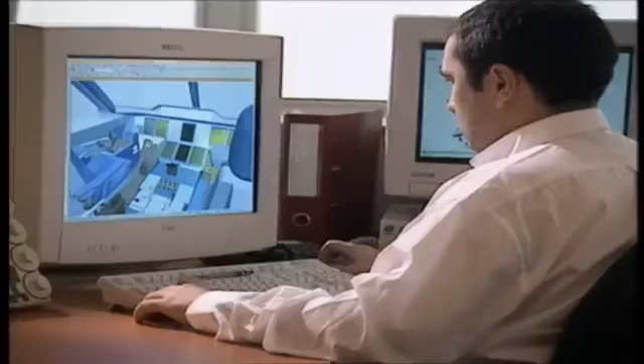It's a mega plane, bigger and heavier than any other passenger plane in the sky. It will hold more people than any commercial jet flying. Designers have spent billions. Now is the moment of truth. Will the world's biggest passenger airliner survive its maiden flight?

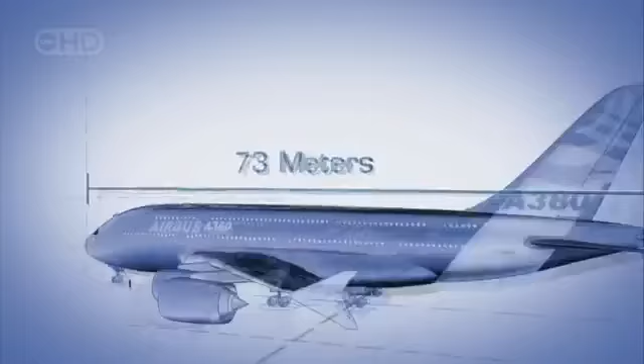An early spring morning, clear skies and a light breeze over southwestern France. Crowding the fields that flank Toulouse International Airport, 40,000 spectators, backpackers, campers and journalists from around the world, all vying for the perfect spot to watch the maiden flight of the Airbus A380, the largest passenger plane ever built. It's 73 meters long, 7 stories tall at the tail, almost 80 meters from wingtip to wingtip, heavier, longer and taller than a 747, with 2 full levels of seating, enough to hold over 550 passengers.

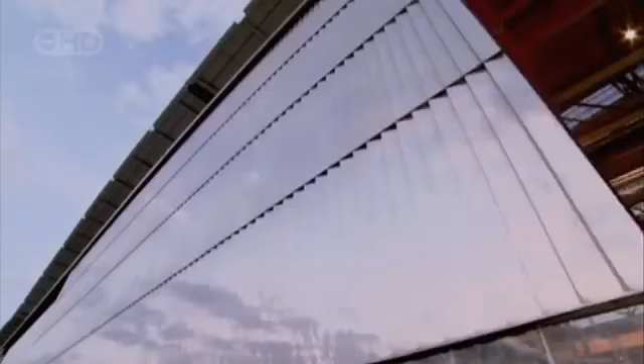Getting this monster off the drawing board required new, super lightweight materials, 4 powerful new mega-sized engines, massive new factories across Europe, and a computerized flight control system more sophisticated than any other in commercial aviation. This moment is the biggest gamble that the company has ever taken. A $12 billion investment, the company's entire future, and the lives of future passengers all ride on the success of this historic test flight.

Alongside the runway, a hush settles over the crowd as the megaplane comes into view. Gradually, it gathers speed, accelerating to reach its takeoff velocity of 269 kilometers per hour. Then, as it nears the end of the runway, the moment of truth. The massive nose tilts skyward. A sliver of daylight appears beneath the rear wheels, and the Airbus A380 takes to the sky for the very first time.

The engineers and technicians in the crowd breathe a collective sigh of relief. Their baby is flying.

The question now is, does anyone want a plane this big? Will the unprecedented size prove a boon or a boondoggle? Is this super jumbo the future of commercial aviation? Or the biggest white elephant since Howard Hughes built the Spruce Goose? It all depends on whether Airbus can convince airlines that travelers will want to trust their fates to this flying cruise ship.

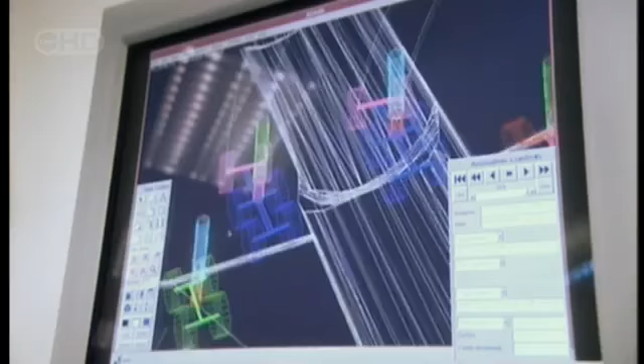It's a breathtaking dream, but no one knew if such a plane could be built. Some argued that such a craft would be far too heavy and expensive to be practical. But a tenacious and aptly named Airbus executive, Charles Champion, wouldn't take no for an answer. He encouraged his design team to think outside the box. There were lots of weird designs. Some looked at the double bubble, one of their first ideas—a double-wide fuselage. It looked promising, but computer analysis showed that it would be far too heavy and not sufficiently aerodynamic.

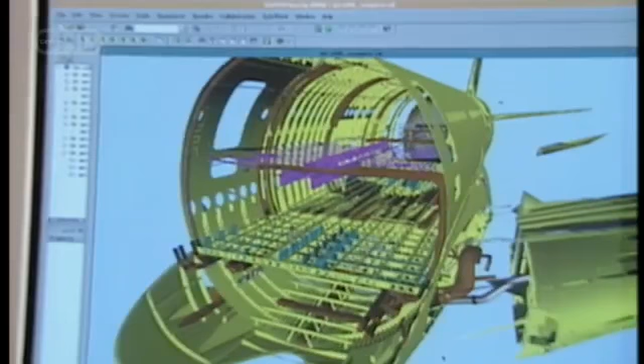So Champion sent his team back to the drawing board, and eventually they came up with this history-making concept: a full-length, double-decker passenger cabin, with a third deck below for cargo. Space-wise, it's the equivalent of 2 complete wide-body cabins, one on top of the other. The new plan called for an aircraft only 2.5 meters longer than Boeing's 747. It was 15 meters wider and 5 meters taller.

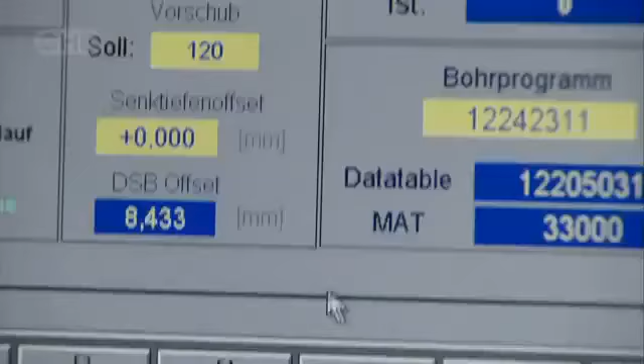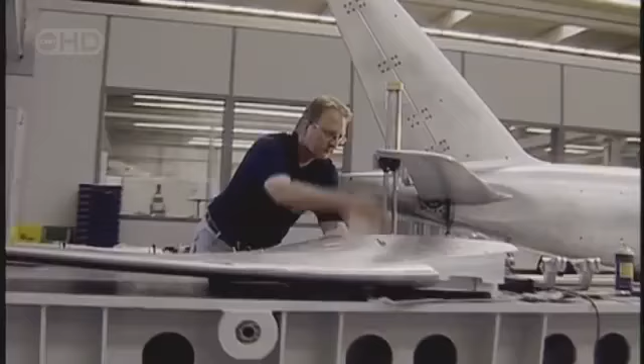But when they ran the design figures through the computer, they had a shock—the plane was far too heavy. We came up with horrid figures, saying, my God, this is the weight of the aircraft, it doesn't work. So what we did immediately at the launch of the program, or 2-3 months afterwards, we launched a very strong challenge on the weight. The team set out to bring the base weight of the aircraft below 277 tons—that's only about 50% heavier than the 747. An ambitious goal for a plane designed to carry over 100 more passengers and their luggage halfway around the world. Unless Champion and his engineers could find the means to beat that target, the dream would die.

Airbus engineers were faced with a design challenge that called for a lightweight plane carrying over 550 passengers at a lower cost per seat, not to mention quieter and less polluting than anything in the air. The design team knew they would have to rethink everything. They needed lighter materials, more powerful engines, larger wings, even bigger and smarter factories. Every component would have to be scaled up from supersize to mega size.

But even while the engineers were still scratching their heads over the details, the Airbus sales force was already hard at work, seducing customers with visions of the future. They created a full-sized interior mock-up that promised passengers in coach some relief from the grind of travel, with seats an inch wider than in other planes, and overhead bins 10% larger. Each plane can also feature a new interior illumination scheme to eliminate the upsetting effect created when flight attendants suddenly switch on overhead lights. The kinder, gentler system in the A380 mimics the gradual transition from day to night and back to daytime again. These and other innovations make the plane distinctive, but it's the promise of opulent luxury that really turns heads. To help build excitement, computer programmers constructed a virtual showroom where airlines can bring to life their wildest design fantasies.

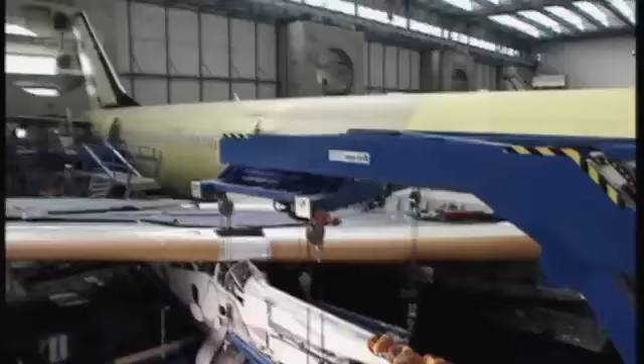Of course, no dream could take flight until engineers came up with a way to lift all that weight. In late 2000, builders finally settled on a design. For power, they would buy engines built by Rolls-Royce, capable of providing 30% more thrust than the engines used on the 747. Each massive power plant cost $15 million, as much as a ton of gold. Altogether, they account for almost 25% of the cost of the entire plane.

If there's one thing this aircraft needs, it's thrust that won't quit. Each engine provides up to 80,000 pounds of force. Running at top speed, this mega guzzler sucks down a litre of gasoline every second.

The A380 is designed for routine flights lasting 13 hours or more. That means when it's fully tanked for takeoff, the A380 carries a lot of fuel, 260,000 litres, 20% more than the load carried by the 747.

Just imagine what would happen if anything threatened the integrity of one of those fuel tanks, like a catastrophic engine failure that sends shards of metal tearing through them. That's the nightmare that haunts engineers at Rolls-Royce, and they're about to destroy an engine to make sure it never occurs.

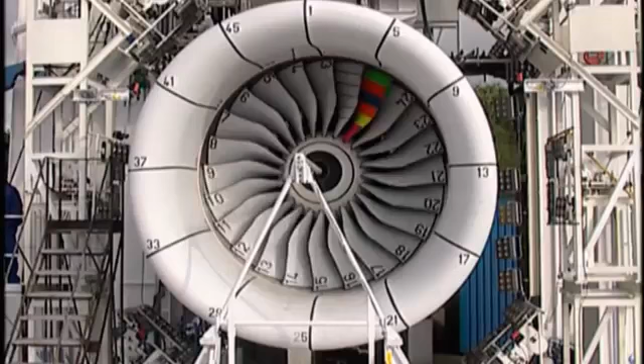These 24 titanium fan blades suck air into the maw of this A380 engine. Each blade is 1 meter in length and weighs 15 kilograms. Lightweight, but super strong.

When the engine is roaring along at full throttle, the blades spin at almost 3,000 revolutions per minute. The centrifugal force at the tip of each blade is equivalent to the weight of a 110-ton locomotive.

If one of these were to break off and escape into the engine, it could wreak unimaginable destruction to the plane.

That's why Rolls-Royce engineers are about to conduct an engine failure test. They're going to intentionally cause one of the fan blades to break off at full speed in order to prove that the engine enclosure can contain the damage without letting any metallic fragments escape.

In the process, they will totally trash this $15 million engineering marvel, a small price to pay when the lives of over 550 people could be at stake.

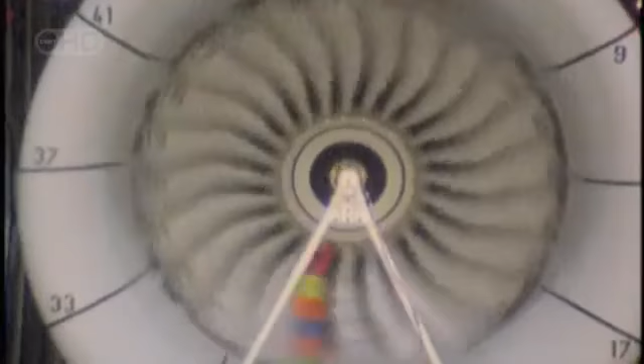A super slow-motion camera captures every moment in excruciating detail. The blades are striped to make visual measurement easier. When the fan is spinning at full speed, engineers send a signal to explosive bolts at the base of the multicolored test blade. Faster than even this camera can see, the knife-like piece of metal shears off and flies into the engine mechanism, wreaking havoc, but no fragments escape.

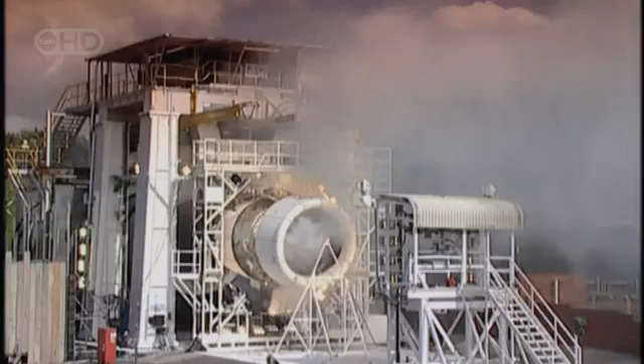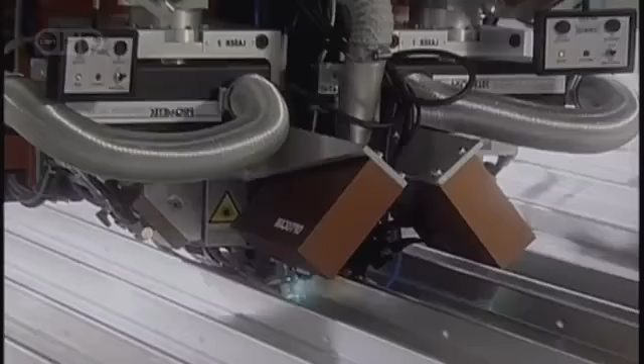The A380 engines are safe for flight, but there are many more pieces to the puzzle. Every other major component would have to be designed from the ground up.

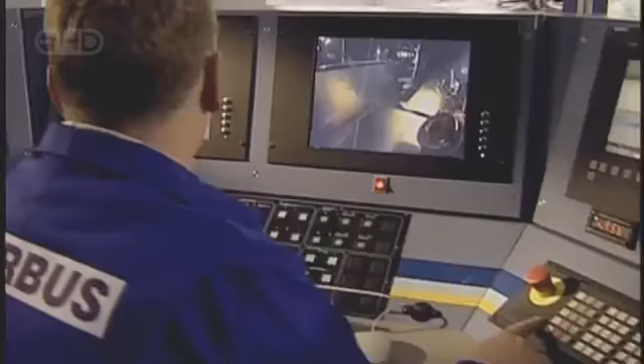Luckily, Airbus has already turned the world into a giant mega factory, with 1,500 suppliers and facilities used to build its existing planes, scattered over 30 countries, yet tightly linked by an advanced communication and transportation network.

To assemble the hundreds of A380s the company hopes to sell in the coming decades, planners settled on 5 countries to build the major components: wings in Wales, engines in England, the fuselage and vertical tail section in Germany, the horizontal tail section in Spain, and of course France, where all the pieces came together to assemble the finished plane.

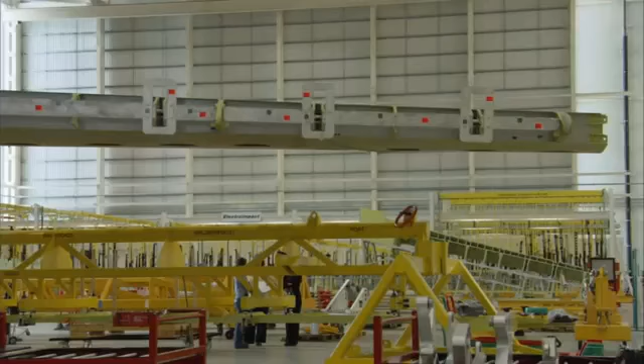The process begins in Wales, in 2 huge new wing factories, built to assemble the largest and most structurally complex commercial airplane wings ever designed. 32,000 components, shipped in from every continent except Antarctica.

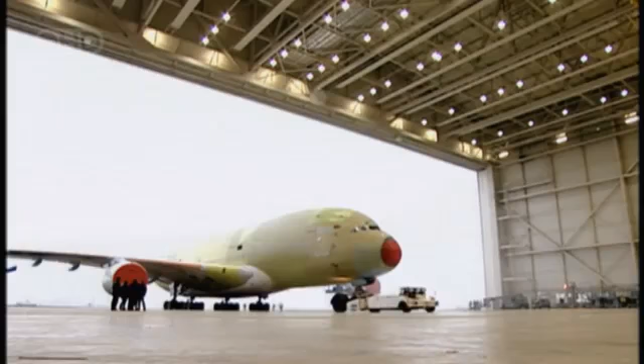The wings on the A380 are true mechanical marvels. They provide flight control and enough lift to carry the fuselage, plus the 4 supercharged engines, each weighing nearly 6.5 tons. And with 260,000 liters of fuel loaded inside 10 interior locations, the wings are also flying fuel tanks. They're one of the most critical structural components in the entire aircraft.

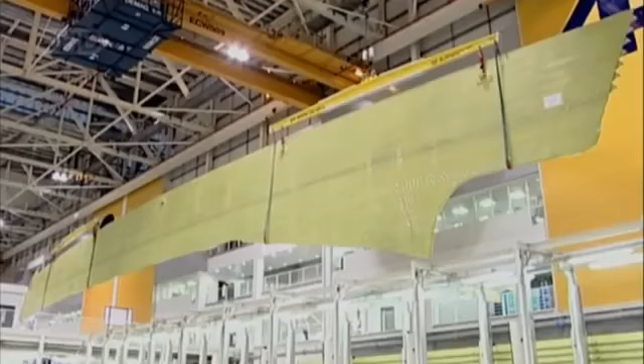The precision construction process begins with sheets of aluminium, destined to be shaped into the 10 panels that cover each wing. Each piece has its own shape and weight requirements. To whip one up, just follow 3 not-so-easy steps: shave it, wrap it, then bake it.

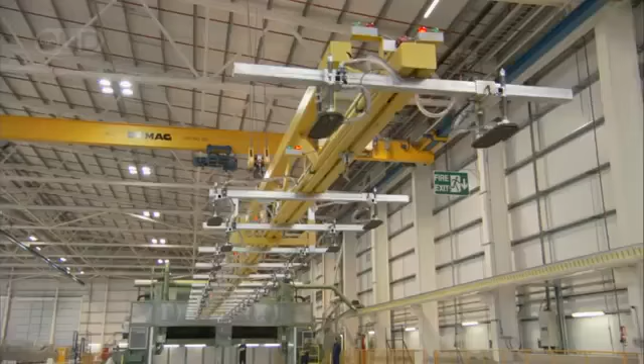This 34-meter-long slab of aluminium weighs in at 5 tons, way too heavy for the wing panel it's destined to become. In its final form, it will weigh close to 1 ton. So off it goes, to get the aerospace version of a tummy tuck. Overhead cranes use 32 powerful suction nozzles to lift and transport each aluminium slab.

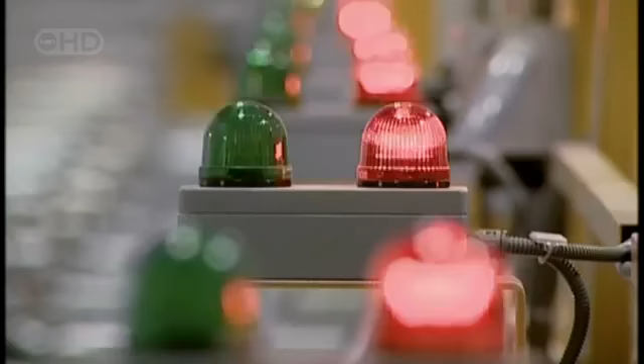Tim Fernifer carries the burden of responsibility. Using a remote-controlled steering device, he guides the 5-ton piece of metal across the factory floor, but he can't do it alone. His team must watch the motion of the wing panel throughout the ride. You've got to be particularly careful handling it, but I can't see down the other end, so I need another pair of eyes down there. It's just health and safety issues - we have to watch, make sure everybody's out of the way when it's actually moving.

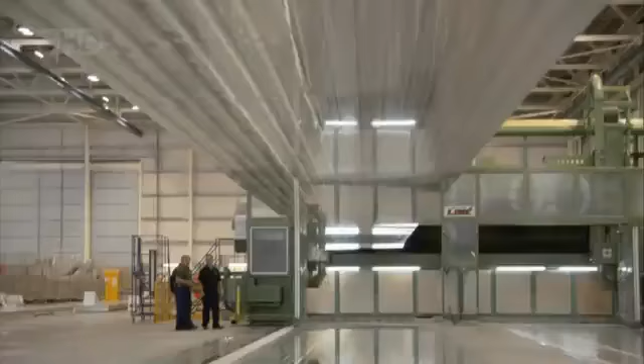It's a dicey ride across the factory floor before the huge sheet can settle safely into position, now under the control of a massive horizontal metal shaping device, a milling machine 40 meters long.

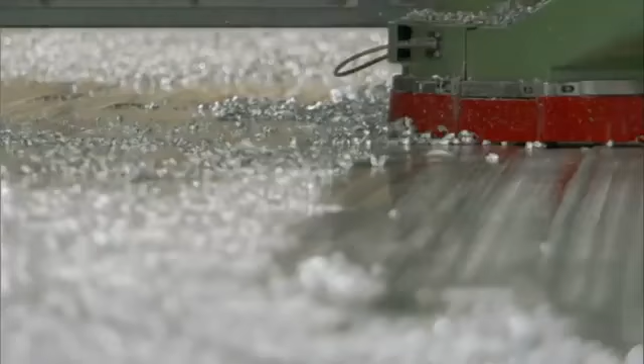Like an oversized cheese grater, the precision cutting head slowly cuts back and forth across the surface of the wing, painstakingly shaving the aluminium until the panel shape matches the 3D contour map stored in the machine's computer. The process takes up to 3 days and eliminates 75% of the panel's weight while maintaining its strength.

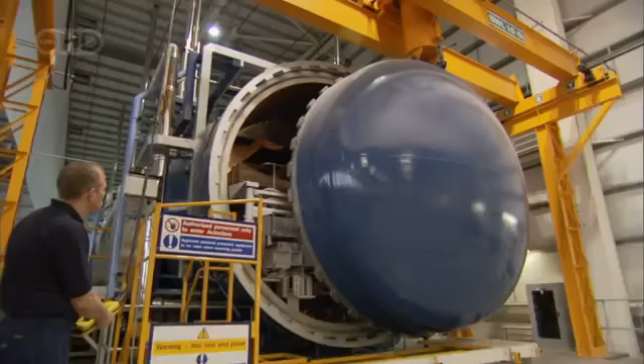Then it's ready for the oven, one of the world's largest pressurized heat chambers, 42 meters long, almost 6 meters wide. Technician John Massey has cooked plenty of wings for smaller Airbus planes, like the A320. It's a challenge to see it go from the size of the 320 to the size of the 380 - it's a huge, huge jump.

The A380 wings are 50% larger than A320 wings. That means a 50% greater chance of error in this critical process. Baking requires careful setup.

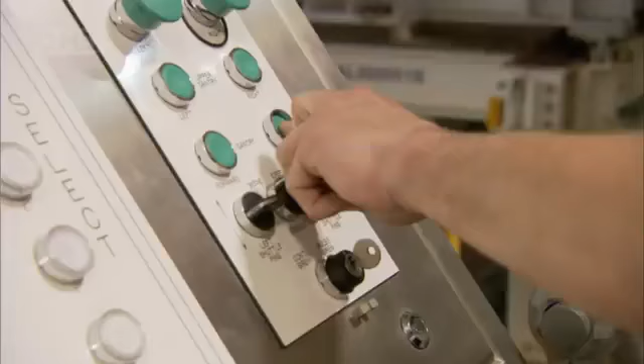First, Massey and others place the segment in a special metallic form. Then they vacuum seal the entire assembly with a massive piece of plastic shrink wrap to protect the metal from contamination. Inside, the heat must be uniform across the entire panel, 150 degrees centigrade, with no room for error.

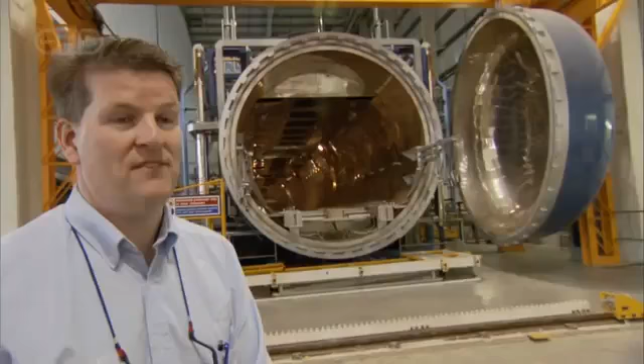We try to avoid any changes in the vacuum or the temperature, so the temperature must remain constant right throughout the process. It must maintain within 3 degrees, otherwise the run is invalidated. After 24 hours, the panel is ready.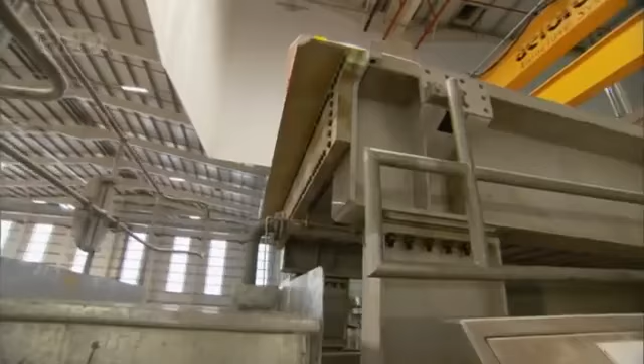Specially equipped vehicles rise up and move into place in front of the oven. All eyes are on the plastic protecting the wing panel. If it breaks, the aluminium wing piece is compromised - a disaster. The entire wing panel would be worthless. If the bag bursts, it means starting the job again from scratch.

Anxiously, they scan the surface for any breach. At last, the wing is cool enough to touch. Good news - the bag appears to be intact.

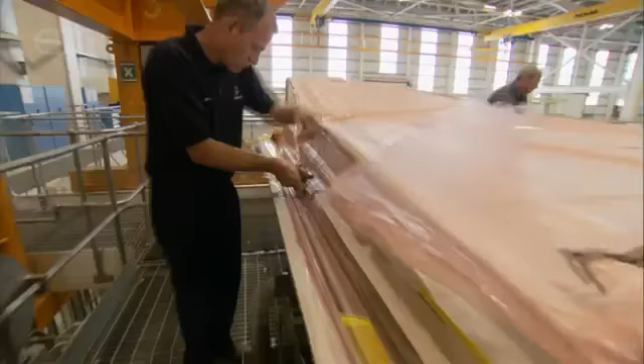Finally, the wing segment arrives in its docking bay. Here, the technicians first remove the plastic and cloth wrap. Now begins the tedious search for flaws.

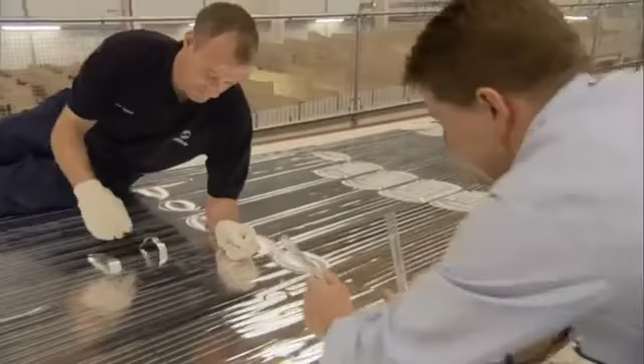John's boss, Gareth Williams, arrives to inspect the piece. He retrieves small metal rods that were baked onto the top of the wing panel. Each of these cylinders tells an important story about future safety. These are test pieces made of the same material as the wing panel, and we use them to confirm that the heat process this part's just gone through is correct and to the right specification.

When this testing phase is complete, Gareth and John get the okay to move the wing to its next destination - the nearby wing assembly plant, an enormous brand new factory located just up the road. It's one of Britain's largest industrial buildings built in this century, nearly 85,000 square meters in area, equal to 12 full-size football pitches.

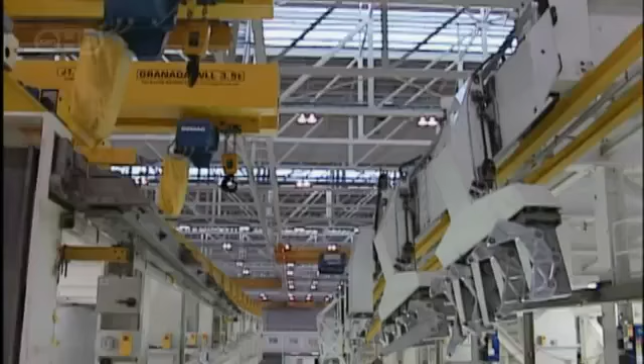This is where the builders attach the aluminium skin panels to the wing skeleton. George Lee guides his team through the tricky assembly process. Today they're preparing to lift and place one of the largest of the 10 aluminium panels, 34 meters long and weighing in at more than 1 ton.

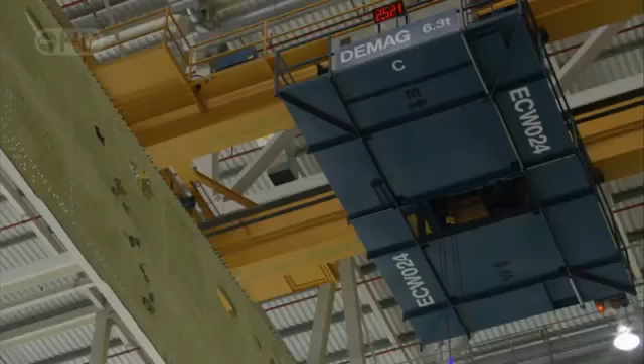Size is a great challenge because everything requires some form of overhead lifting. Nothing can be lifted manually, so virtually everything requires overhead craneage movement, and therefore the management of the craneage system is very, very important. The panel hangs like a huge guillotine, suspended over the factory floor.

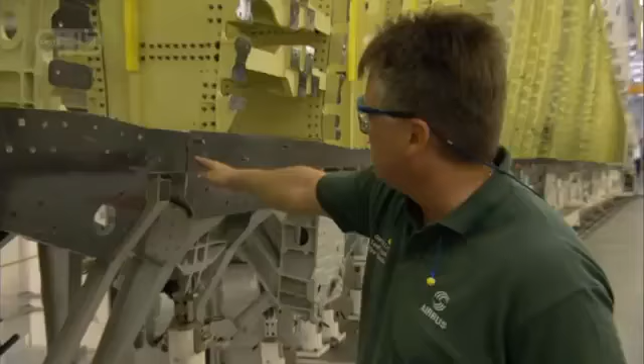But that's not all that's hanging over the assembly team's head. Time is running out. Along the edges of the partially constructed wing, builders have applied a sealant that'll help ensure the integrity of the fuel tanks. The sealant dries quickly, within hours. The team must fit the wing panel into place before the sealant dries, or the wing could be defective.

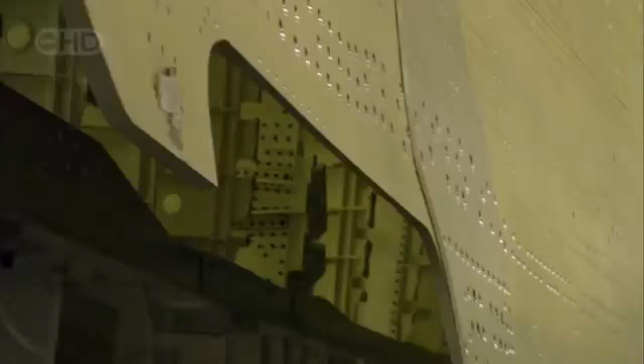This time they're cutting it close. The only concern I've got is the time factor. If they don't succeed, the team will have to scour the sealant off the aluminium surface and start the whole process again.

Finally, the panel settles into place - 1 down, 9 to go. It can be stressful, yeah, it can be stressful. At certain times it's an enjoyable job, because when it actually all works and goes together, it's quite enjoyable. You've made it an achievement.

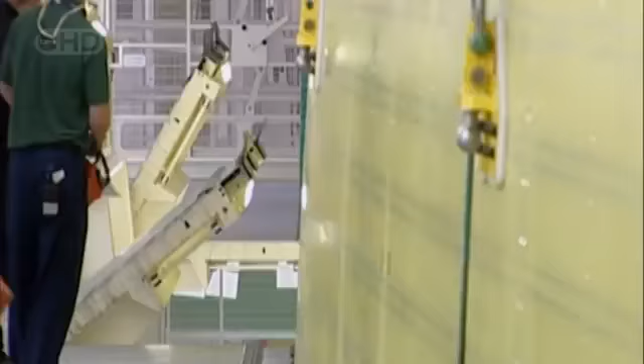Now it's time to glue and bolt together the pieces, like building the world's biggest model airplane wing.

This part of the process remains a carefully guarded trade secret. The company wants our cameras off. No cameras.

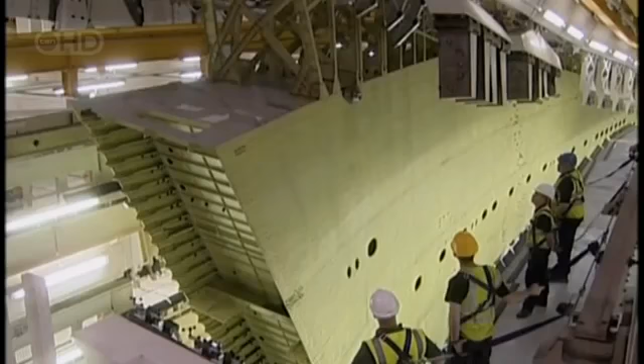The secret assembly process inside the jig will take nearly 4 weeks to complete, but it takes more than a wing to make a plane. All across Europe, more factories are coming online, pumping out body parts of this giant Franken plane.

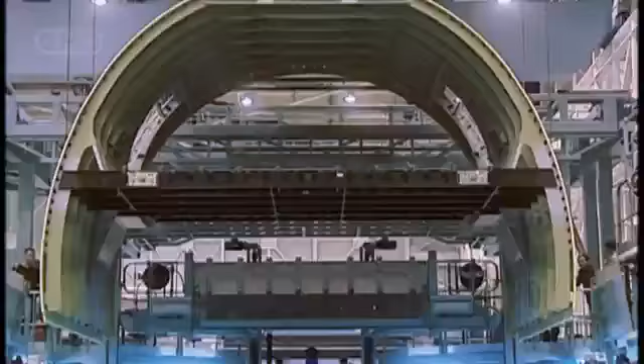But not everyone is happy to see this kind of progress. Some locals in Germany are up in arms over Airbus's ambitious plans.

This is the newest Airbus factory in Hamburg, a megastructure big enough to house 4 A380s side by side. Airbus has been building airplane fuselages in Germany for more than 30 years.

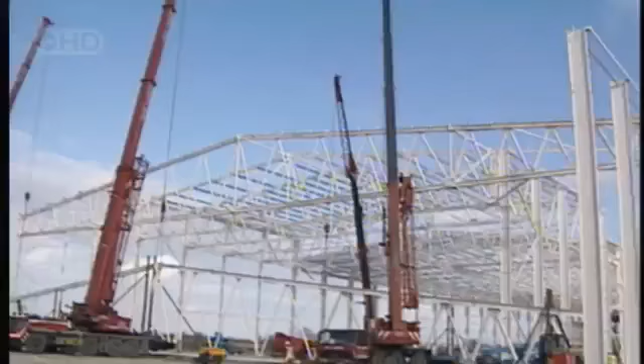But with the announcement of the A380, the company needed to massively expand the site and send finished planes here to get tricked out on the inside and painted on the outside.

No matter what the customer wants their plane to be, a 550-seat cattle car, a high-class hotel in the sky, or even a heavy-duty freighter, this is where the seats, the carpets, the stairs, and yes, even the bar and the waterfall will all be installed.

The expansion plan called for 3 new buildings and a longer runway to accommodate the massive plane, but there was a problem.

Airbus's main factory here sits alongside Germany's Elbe River, smack in the middle of Europe's largest tidal wetlands. It's a very special area because we have there the influence of water from the country and tidal water from the sea, so we have a mixture of sweet water and salt water.

This fragile ecosystem is home to 70 species of migratory birds. Now 71 if you count the Airbus A380. Airbus wanted to fill in 140 hectares of pristine wetland, and local activists cried foul.

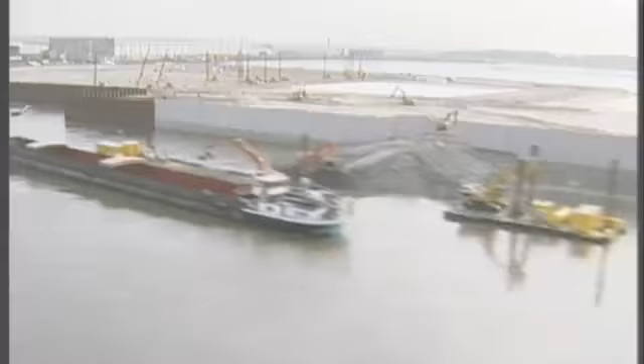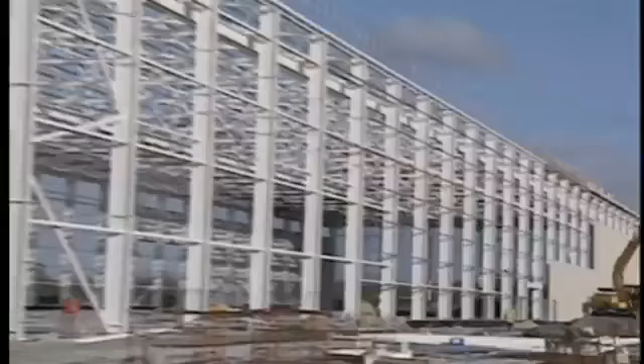A pitched battle in the courts and demonstrations in the streets delayed construction of the factories for over 2 years. But eventually, local and national politicians who wanted to bring business to the community intervened. The factories went up. One got busy building fuselage segments, but the other 2 stand nearly empty.

More lawsuits still block the Hamburg facility from taking delivery of all of the planes it's meant to finish. Unless the company wins in court, it may have spent a few hundred million dollars building a factory of little use.

The problem lies with the runway. Airbus needs a longer runway to accommodate a heavy-duty cargo version of the A380.

We need the runway extension in Hamburg for the pilot to test the performance of the aircraft, and he only can test this when he has an aircraft with a weight which is approximately the weight you normally have in cruise altitude and a normal scheduled flight.

That plan to lengthen Hamburg's existing runway has met with considerable resistance from locals. Their concern: extending the runway will bring the tarmac to within just 450 meters of village orchards, and uncomfortably close to a Lutheran church that houses a priceless organ built in 1688.

A delicate instrument that could be damaged by ground vibrations and wake vortices, turbulent bands of air similar to miniature tornadoes. We have very precise information on the generation of these wake vortices, small tornadoes, wind generated by every aircraft, more or less.

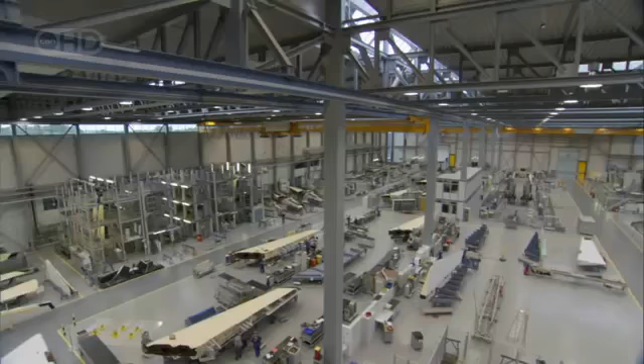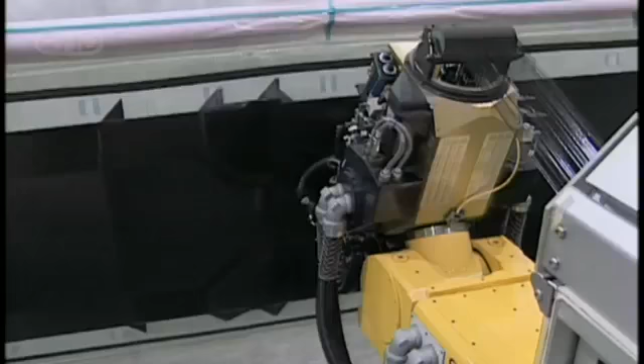But just 57 kilometers away in the town of Stade, another big gamble is underway. The company is using a futuristic material to build the largest commercial aviation tail fin in the world. It's called carbon fiber reinforced plastic, made from the same stuff that gives diamonds their incredible strength. Carbon fiber is 6 times stiffer than steel and much lighter. It's the only option if builders are going to keep the weight of the plane below the target of 277 tons.

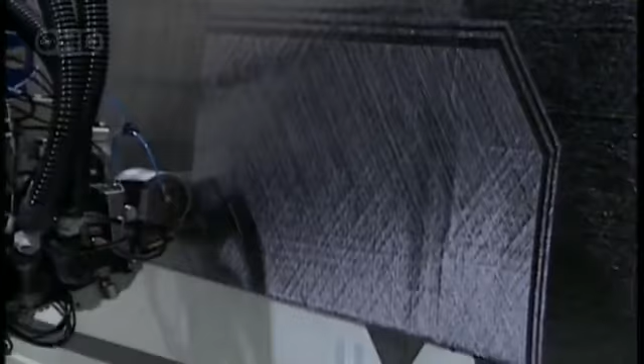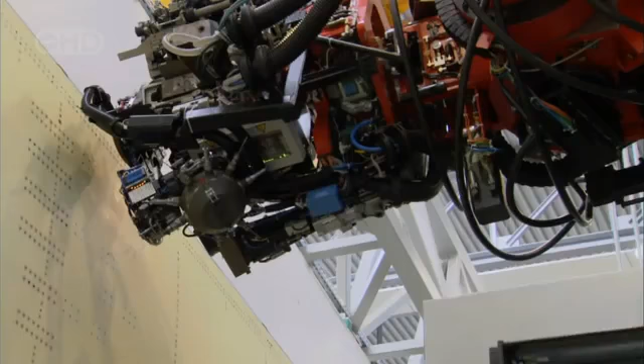Unlike forged metal, carbon-reinforced plastic parts are actually woven, like cloth. Fabricating machines spin out tail panels by combining super-strong carbon fibers with plastic resin to create almost any shape designers can imagine. After baking, strengthening, painting, and drying, technicians join the lightweight panels to the tail skeleton with the help of a computer-controlled riveting robot. Working around the clock for a week, the robot makes 10,000 critical connections with tolerances no human can match. The integrity of the tail fin is crucial to the safety of passengers.

Airbus engineers know only too well what can happen if a tail structure fails. In 2001, American Airlines Flight 587 left JFK Airport in New York. Less than 3 minutes later, the Airbus A300 aircraft had crashed in Rockaway, a neighborhood in Queens, New York. The belly fell, the plane pitched, then the left side went down as it made its way to the ground.

It was the second deadliest crash in US history, and investigators made a disturbing discovery. It had been caused when the tail fin and rudder, made partly out of composite materials, sheared off as the plane accelerated. Investigators concluded that cockpit errors, not a failure of the carbon composite material, most likely caused the crash. Builders have applied the lessons of that catastrophe to the tail fin of the A380.

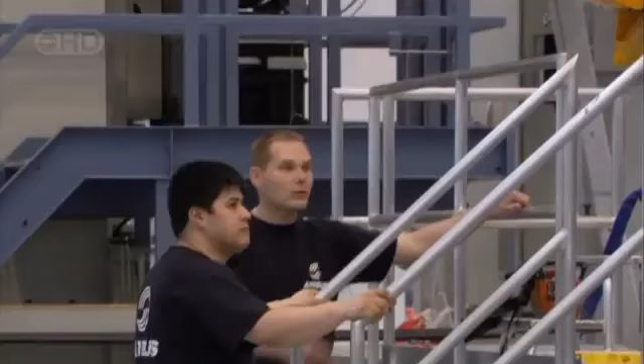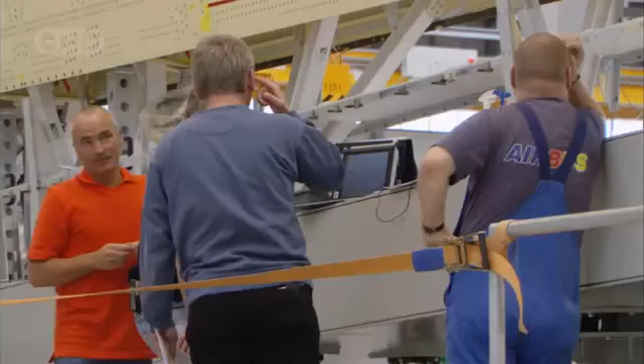But today, something's gone wrong on the factory floor. A lightning strike zapped the power supply, and now the precision riveting robot is dead in the water. We had a storm, a lightning strike. The PC failed and the hard disk was completely gone. Mother Nature has thrown a wrench into the works, causing a total crash of the system. It is electricity. Sometimes it happens. Normally we are protected, but it can just happen.

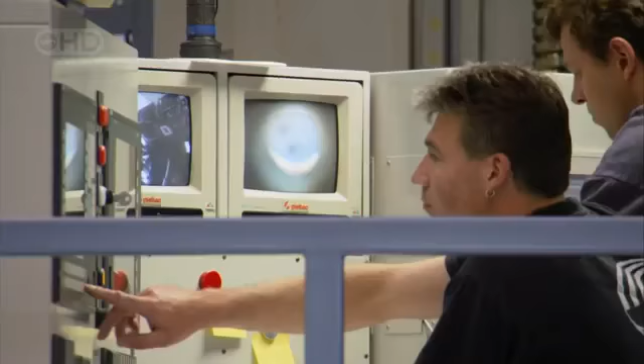Critical hours pass as Kai Baumgartner and his colleagues struggle to get the robot back online. If they can't fix the computer, they can't make the deadline set for finishing this tail fin. Kai and his team must find the problem, and quickly. By the end of the shift, the sound of riveting echoes through the factory once again.

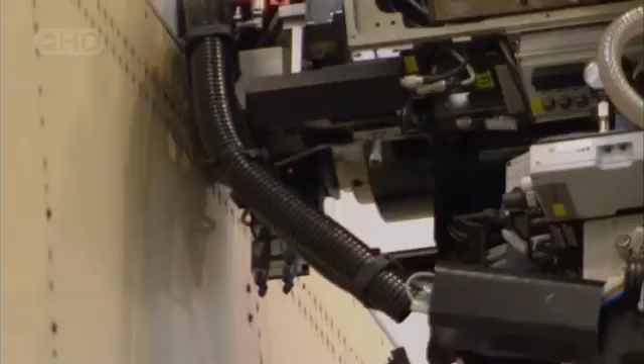Kai is finally back at work, personally verifying that every one of the 10,000 connections is perfect. A tiny camera positioned on the end of the riveting machine allows Kai to carefully examine each rivet, making sure to catch any abnormalities in the process. I make sure that the drill doesn't get stuck or any mistakes happen. I have my different systems here. It can happen that something gets stuck or that an error occurs. It's a repetitive process, but Kai must remain vigilant to safeguard the lives of future passengers.

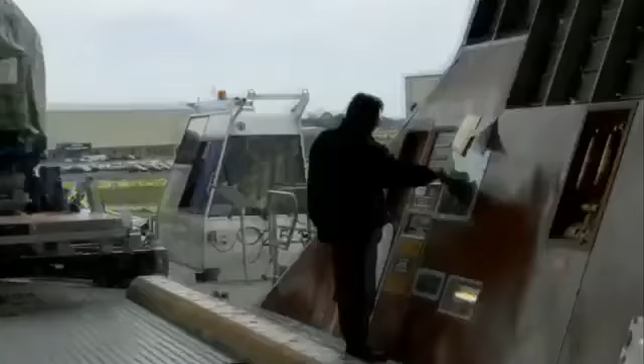Around the world, manufacturers and suppliers are putting the finishing touches on the components of the A380. But putting all the pieces together will be a logistical nightmare. Airbus's existing transport system, the custom-built mega freighter called the Beluga, is too small to haul the A380 components to the assembly factory in Toulouse, France. So builders came up with a risky plan to haul millions of dollars of critical components by water and land.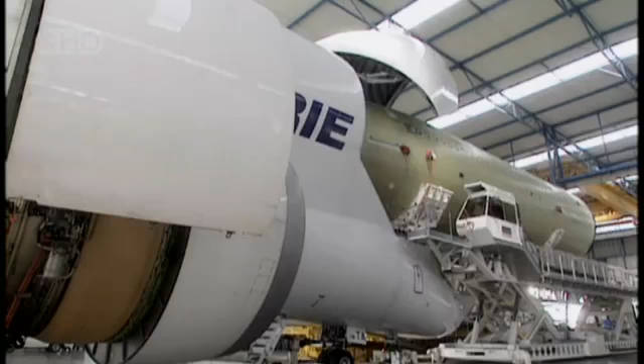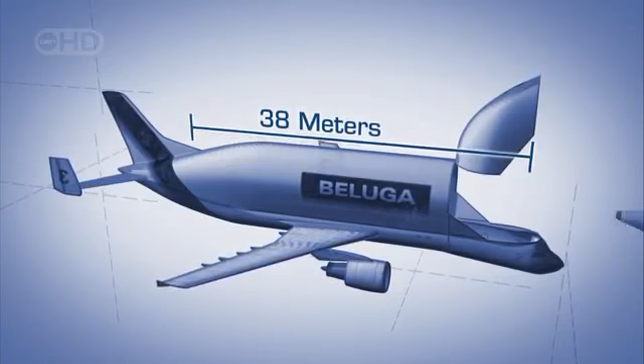Airbus had a problem. They needed to move pieces for the largest passenger plane in the world from factories all over Europe to their final assembly plant in Toulouse, France. For smaller planes, they could use the Beluga, Airbus's distinctive custom-built transport plane. The Beluga's cargo hold measures 7 meters high, 7 meters wide, and 38 meters long, big enough to swallow the fuselage, wings, and tail sections of Airbus passenger planes like the 150-seat A320.

But when Airbus decided to build the massive A380, the sheer size of the parts overwhelmed even the Beluga. The Beluga is far too small to carry the A380's enormous double-decker fuselage or its record-breaking wings. So to get their parts to the assembly plants, the company now had to move them by sea and over land, instead of a 2-hour ride in the belly of the Beluga. Parts for the A380 joined a days-long parade of specially outfitted ocean ships, river barges, and trucks.

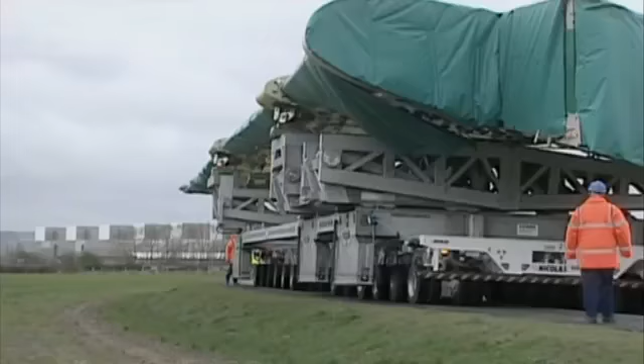Keeping this massive system on schedule is the job of Surface Transport Coordinator Philippe Nedelec, who has to keep it all moving fast. I like to say that I am a kind of conductor. I have to impose the tempo to everybody.

Wings and fuselage arrived by sea in the port city of Pauillac in Bordeaux. From there, it's 96 kilometers by barge up the Garonne River. It's a tricky bit of navigation to clear the historic Pont de Pierre Bridge, a prized landmark built by Napoleon almost 200 years ago. We have to cross a very old bridge. And at the beginning, the Bordeaux people were very afraid of what these Airbus people are going to do with our nice bridge.

To maneuver beneath the Pont de Pierre, Philippe and his team keep careful track of the tides and the weather. If they don't time their trip just right, if the water is too high or the current's too strong, they could collide with the bridge, destroying precious cargo and damaging a priceless piece of history as well.

But waiting for the perfect moment isn't always an option. Suppose we miss a call for weather conditions or some other things, then the boat can miss a tide, so we can miss 6 hours. And this 6 hours you can miss 1 week because we cannot start the road convoy every day. It's not so easy. We cannot start when you want.

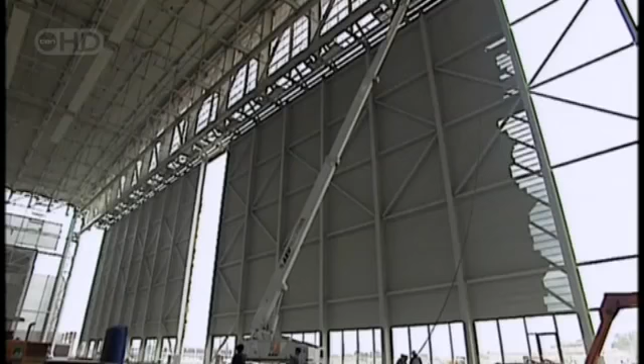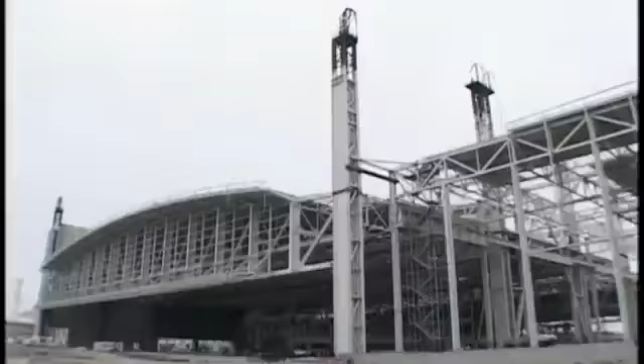At last, the convoy arrives at its destination, the final assembly line, the nerve center of the entire operation. The final assembly line sits on the edge of Toulouse's Blagnac Airport. As with all A380 factories, this one is huge: 500 meters long by 250 meters wide and 15 stories tall, built with 32,000 tons of steel, enough to build 3 Eiffel Towers.

It's in here that the massive plane finally begins to take shape with the help of a gargantuan assembly structure known as a jig. According to Julien Pouillou, there's nothing else like it in the world. We are standing in front of the biggest jig that is used in the world to assemble an aircraft. This is Station 40.

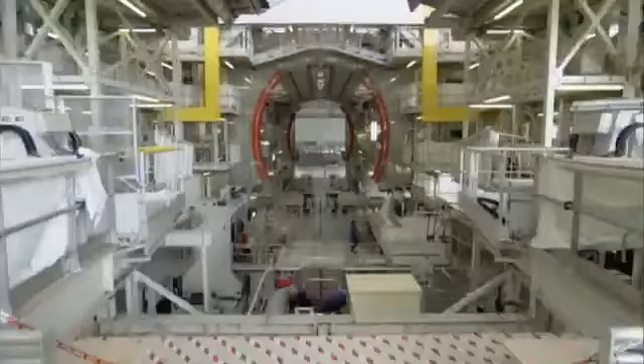Station 40 is where the fuselage, wings and tail all come together. The one-of-a-kind jig stands 5 stories tall, weighs 1,200 tons, and comes equipped with 4 elevators to carry workers to their stations. This is where theory becomes reality.

As pieces made all over the world finally come together, if there's been any error, if the pieces don't measure up to spec, or if the joints don't come together just right, within millimeters, the huge passenger craft won't be fit for flying.

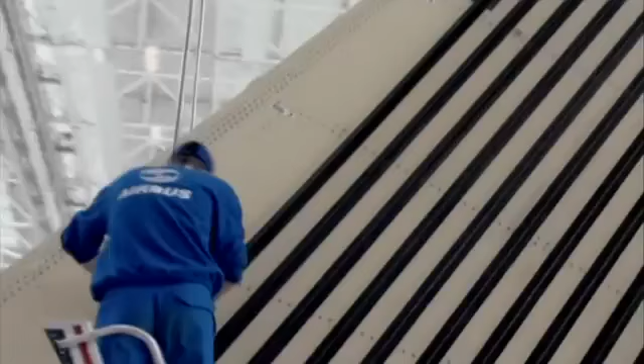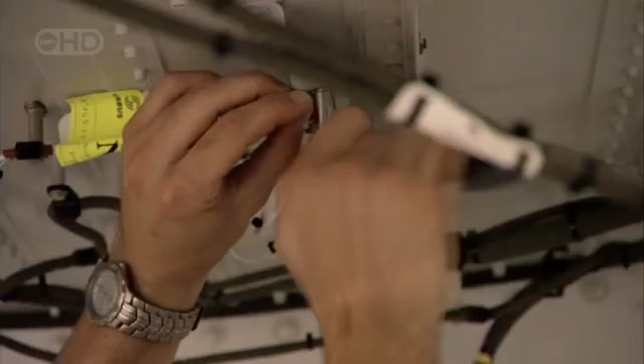The lives of future passengers depend on the steady hands of these craftspeople and engineers, working inside the mighty Station 40. The challenge is for us to assemble those pieces together at the same time, because we have a lot of workers working in the same area at the same time, and they have to do all sorts of completely different tasks. One has to take care of the wings and one has to take care of the fuselage, and so they are not doing the same job, but they have to do it together.

Work on this plane now proceeds at an intense pace. It'll take 4 weeks to complete the assembly.

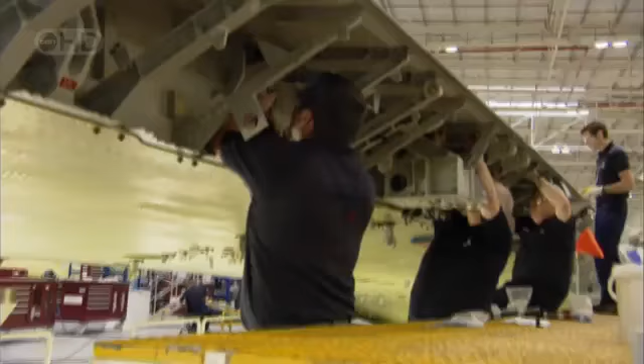Once the plane has been released from Station 40, it moves through a pair of 100-meter wide sliding doors and makes its way to the systems hall. Inside this gigantic space, 3 A380s can sit side by side comfortably, while technicians swarm over the superstructure, testing the electrical, hydraulic and plumbing systems that'll bring the dormant aircraft to life.

Building just one A380 is a massive job, but for Airbus to survive, they're going to have to speed up production to a breakneck pace. Eventually, the Station 40 team will have to crank out a defect-free plane every week.

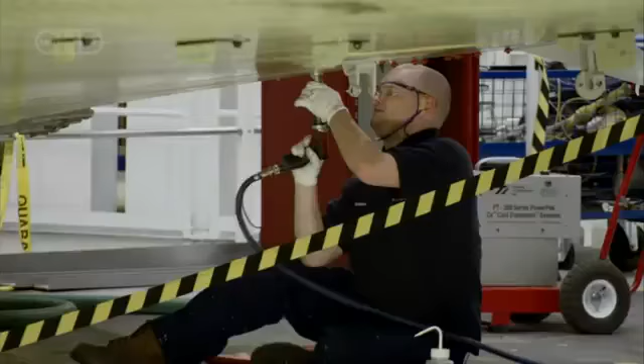But before that can happen, the plane must be proven airworthy. Now all eyes are on the skies over southern France as the gathered crowd wonders, will the A380 survive its maiden flight?

At Blagnac Airport in Toulouse, 40,000 people anxiously scan the skies, searching for some sign of the A380. All flights in and out of the airport are put on hold. The skies over Toulouse are eerily quiet.

Nearly 4 hours have passed since takeoff. If all goes as planned, the huge airliner should swing into view at any moment. But if there's a problem, the flight crew will quickly discover how well their training has prepared them for disaster.

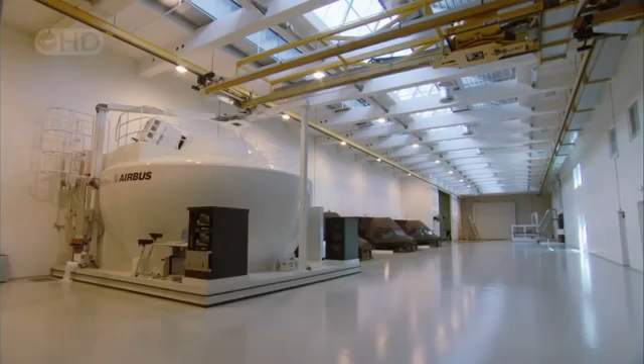Much of that training took place using powerful computers, programmed to mimic the behavior of the A380. That's the theory anyway.

In a simulator like this one, with a computational engine 500 times more powerful than a home video game console, photorealistic visuals help pilots to get a feel for the plane. Despite the A380's unprecedented size, Airbus engineers have tried to make it fly like any other airliner.

100 knots. The task of testing the verisimilitude of the simulator experience rests on the shoulders of pilot Claude Holvec.

I would say that it's exactly as a conventional aircraft. And it's quite amazing because this aircraft is so big and so heavy. This surprised most of people, and especially pilots.

One of the most important functions of simulators is to give pilots the chance to flirt with disaster. Very simple, and one engine is shut off. This is engine number 4, and look what is happening. The aircraft is just moving slowly on the right side.

It would take a lot more than an engine failure to knock this monster out of the sky. But test engineers are nothing if not imaginative, and they've loaded their simulators with more than 400 different catastrophe scenarios, everything from a fire in the cargo hold to a devastating lightning strike.

I think it was a great moment of emotion, and somehow we did it. You know, it's alive. It's alive. They've proven that the plane can fly, but that may have been the easy part.

At the time of the test flight, Airbus had 154 orders and still needed 96 more just to break even. To fill those orders, they must dramatically increase the speed of production and convince the world's airlines to pay nearly $300 million for each plane.

But even while potential customers were lining up to drool over decor, and the engineering team was still basking in the afterglow of the successful first flight, Airbus surprised the industry when it unexpectedly announced a 6-month delay in the delivery of the first aircraft.

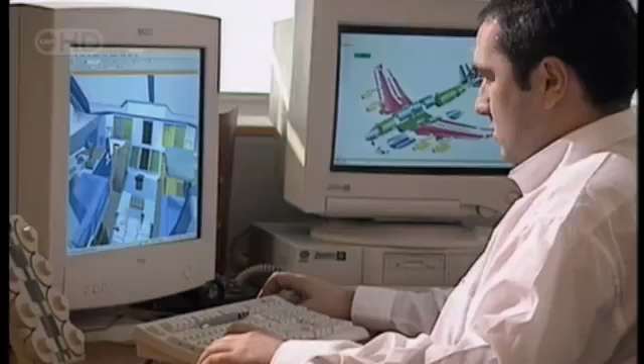Early customers who took the risk and put down deposits before the first plane had ever been built are not happy. Some analysts believe the plane is still heavier than Airbus promised, but Airbus insists that the delay is merely routine. The real achievement will be when the customer says, 'Great, this is what I expected, I love it, give me more.'

If the last 40 years in the history of aviation is any guide, and more people fly further and more often, year after year, then Charles Champion's daring bet may well pay off, and the A380 just might become the flagship of commercial aviation well into the 21st century.